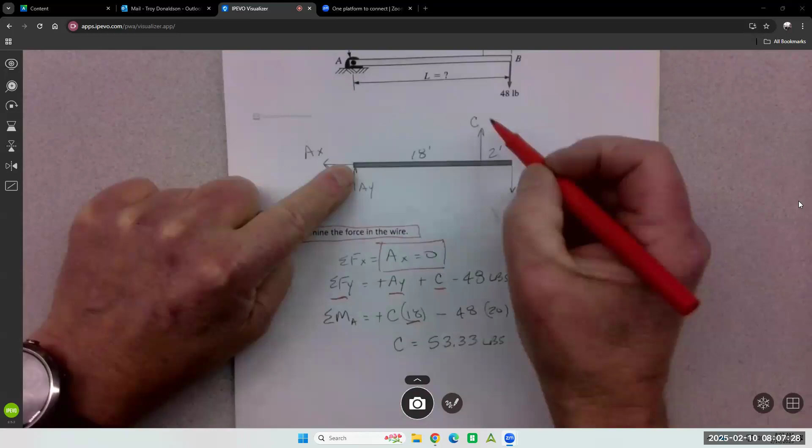Did the moment at A. That's here. So it's C times 18. Rotation is counterclockwise positive, and 48 times 20 negative. Look good now? Makes sense now. And then you just use your algebra to solve this, because this becomes the equation, right? So this statement moves to the other side, becomes positive, and then we divide by the 18 to get 53.33.

Well done. Most of you did just fine. Some missed a few little things, like you can't leave the unit off. It becomes pounds, right? We're trying to find the load in the wire. It's pounds. Direction's important, not critical. Questions?

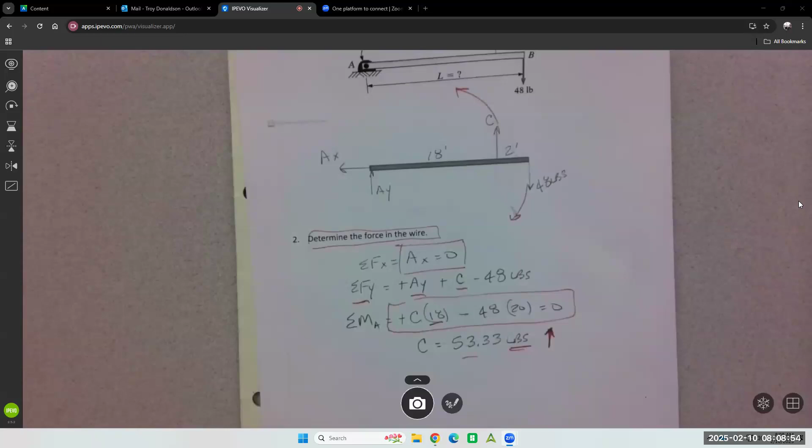Another one on Friday, quiz on Friday. It gets a little more difficult each time. Like we start throwing angled forces in here, then it's going to get a little more complicated. Questions? Any questions on the quiz? Okie doke. Silence is compliance. You know, silence means you don't have any questions. So that could mean I'm not doing my job if I'm not generating a lot of good questions.

All right, let's look at the calendar because this is a critical time in the term, believe it or not. So adult education research has proven weeks 5, 6, and 7 are huge. If you can make it through weeks 5, 6, and 7, you will make it through the term. But it's big. Like there's a lot of folks not here. We're down in numbers. Your persistence level has to go up the next 3 weeks. It's really tough. I'm just saying. Very hard time in the term.

Every term, right? In the beginning, you're all excited about the term. You're going to do really well this term. That's weeks 1, 2, 3, 4. And then 5, 6, 7, 8 are rough. Like, oh God. On an instructor level, this is when we start to feel the crunch. Like I only have so much time left and I got to get through the content. So that's what your instructors are feeling. So they're going to push at the worst time, right when you're getting a little burned out in the term. Anyway, I laid the term out for us.

This class is pretty nice because it has a follow-up sequential course. So I can pace it as we need it, but that just puts the crunch on next term to make up some more time. So that's not fantastic. But we're going to do chapter 4 the rest of this week, and then it'll end pretty much here. And then we'll go into trusses, chapter 5, here. And then week 8 will be trusses again, because it's a big chapter. It has trusses and frames in there, 2 different methods for trusses, a whole new method for frames. It's a lot, and they're long problems. One problem can be an hour, easy.

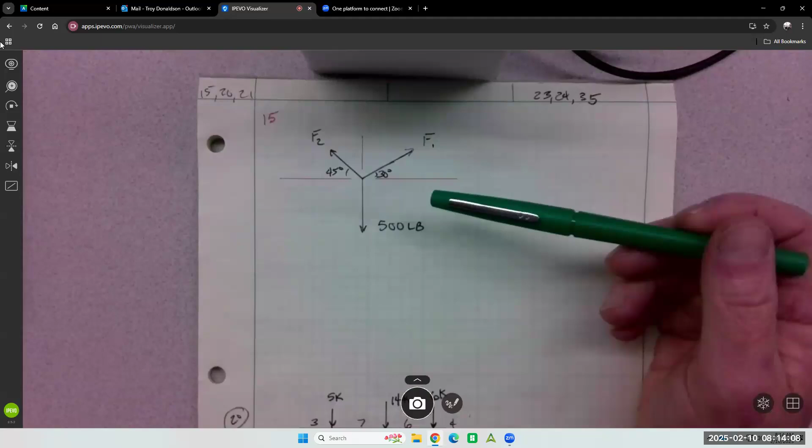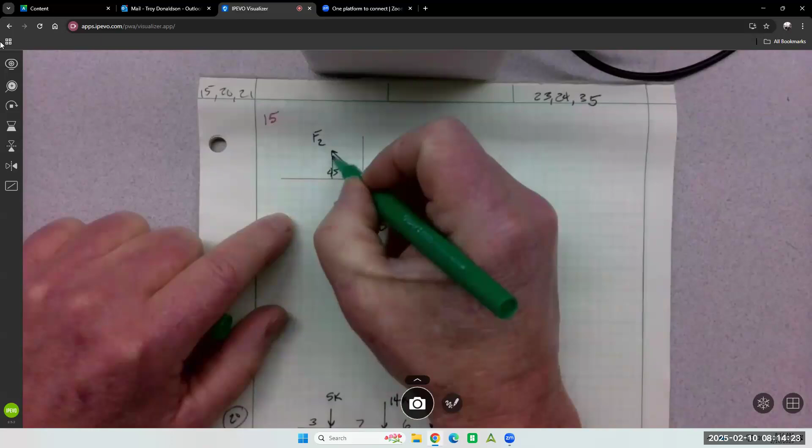Calculate the force in each cable for the suspended weight shown. So, tough problem, because how many unknown forces do we have in the y direction? We have 3 total, 2 unknown, right? This one, F1y, and this one, F2y. 2 unknown in the y direction, right?

How many unknown in the x? 2. There's only 2, but there is 2, F1x and F2x. So that means when I write sum of forces in the x, I'm going to have 2 unknowns. When I write sum of forces in the y, I'm going to have 2 unknowns. Do I do moments on this kind of problem? No, it's concurrent. So that means I have simultaneous equations going to happen. Sum of forces in the x, sum of forces in the y.

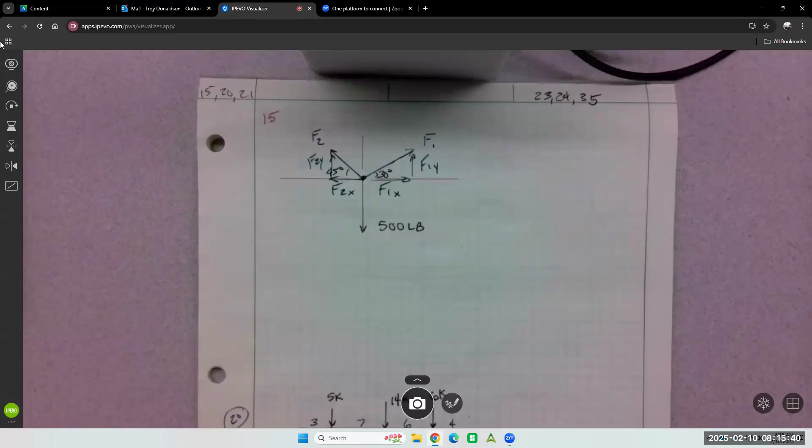So it's really good to think through these. That's what you want to think through on every equilibrium problem. You want to think through that first. Like, how many unknowns do I have in the x? How many unknowns do I have in the y? If you only have 1 unknown in one of those directions, that's where you want to start, right? But we have 2 unknowns in 2 directions. Like, oh, crud. Just means write the equations, solve for x and y. All right.

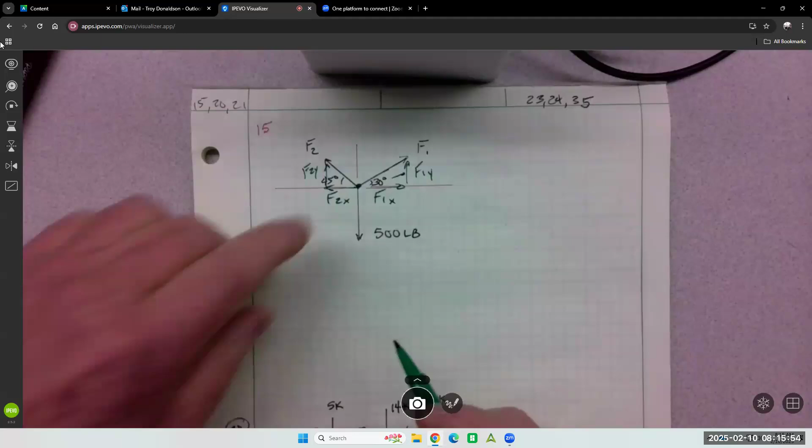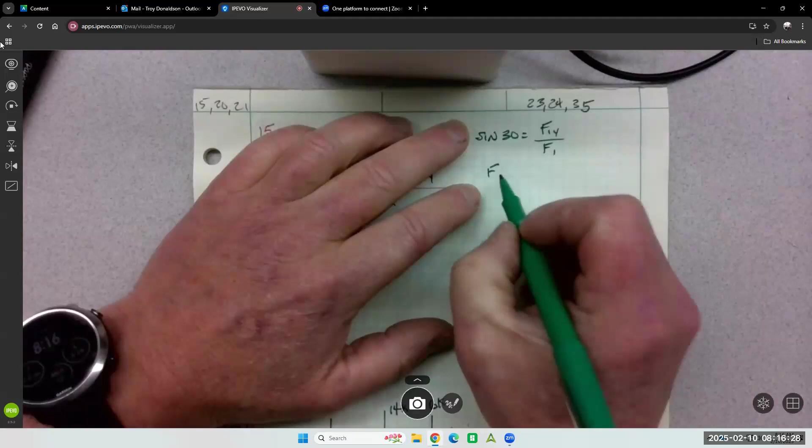So these, you can solve out the components first, so you know the formula, or you can just put it into the equation, however you want to do it. So I'll do this side right here by solving it out. So y is opposite of the 30 degrees, so that's sine. So I can write sine 30 equals F1y over F1. Everyone see that? It's using variables instead of numbers, but we have to be able to get F1y. So F1y, the y component, is equal to F1 sine 30. And that's what will go in the y equation.

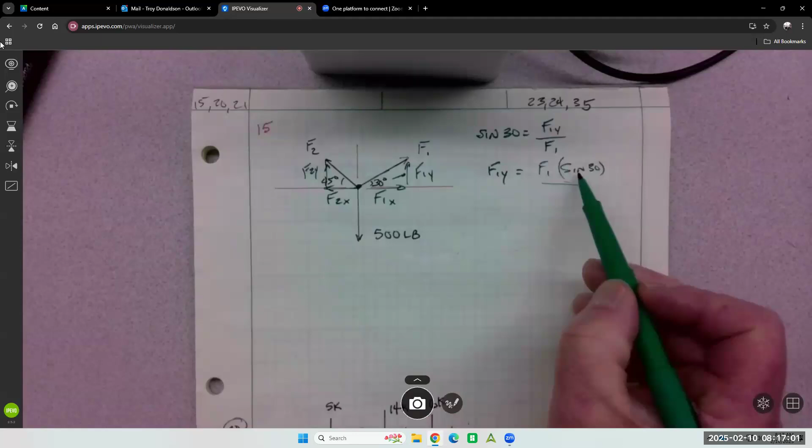Okay, so we're going to end up with F1 as the variable, which is what we want to know, and F2. So you have to do that for each component, right? Or you just know that this is kind of the format for the component, and you just have to figure out whether it's sine or cosine. Well, the y is sine, the adjacent side is cosine. So F1x is going to be what? F1 cosine 30. So there's the two components for F1. Trigonometry again, since day one, pretty much trigonometry.

So once you get that kind of rhythm figured out, then getting this one's not too bad. Sine 45 times F2 is going to be F2y. F2x is going to be cosine 45. Since it's a 45, sine or cosine doesn't matter, but I still try to write it appropriately because that's good practice for you. So now we have all those components, we can put them into the equation.

Right? I can go, oh, sum, here, I'll use a different color. Really into colors today. Anyone colorblind? Okay, hope not.

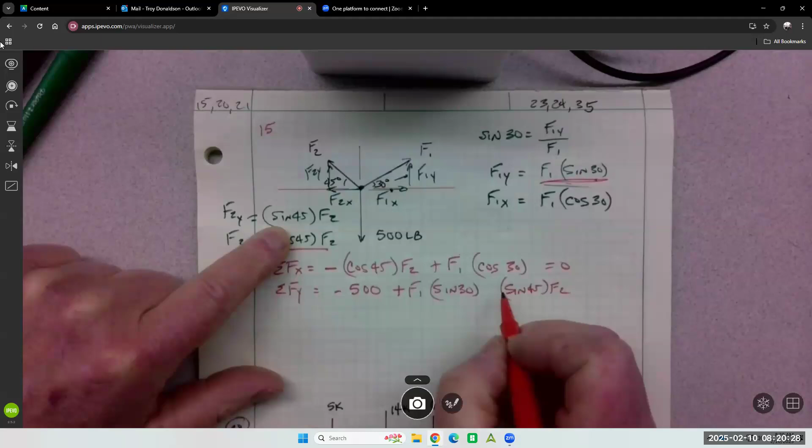If you want, these are just numbers, right? Cosine 30, you can put in your calculator. So these can just turn into F1 times a number, F2 times a number. Whatever makes it look less complicated to you, right? I tend to just do this, and now when I do the substitution, I'll turn them into numbers.

So you choose which variable you want to isolate. I would do the first equation and isolate F1, probably, because it's positive. So then this statement moves to the other side, and I can solve for F1 in terms of F2. So here I solve for F1. So I move this statement to the other side.

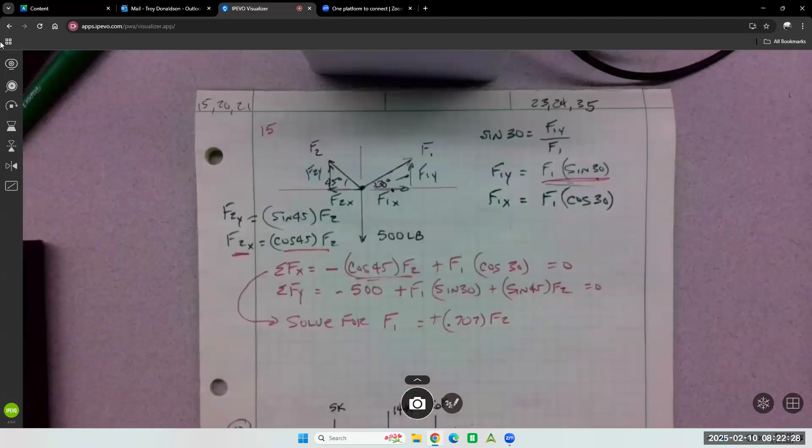All right, and move the cosine F2 to the other side, and 45 cosine is 707. So it's gonna be 707 times F2. That's that statement. Other side becomes positive, and I would divide by cosine 30, which is 0.866, which again is just a number. 0.816 F2.

Everyone see that algebra? If you don't, you got to, I want to help. So that means F1 is equal to 0.816 F2. And then what do I do with that?

Substitute it into the other equation right there. So I can write the other equation now, minus 500 plus, instead of F1, I'd substitute in 0.816 F2, times, because it's times sine 30. And I'm going to figure out what sine 30 is: 0.5. So it's times 0.5. So there it is right there and right here. And then I got to add, because I need the rest of the formula, 0.707 F2. You're just rewriting. I just rewrote this whole formula subbing in.

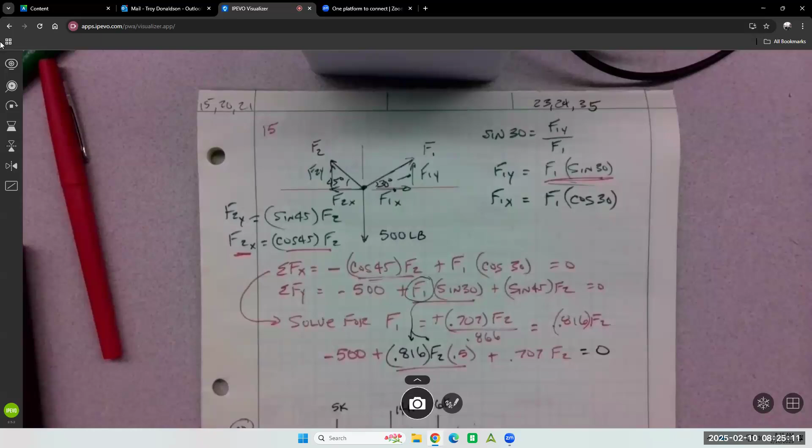Now what do we have? One unknown, one equation. This is just a number F2. This is a number F2. Add those two together. Move the 500 to the other side because it's equal to 0. Got to be equal to 0. So again, it's algebra. These two just add because they're apples and apples, F2s and F2s. You can just add this to this. Move the 500 to the other side and then divide by whatever that constant is.

So this number is 0.408 F2 plus this 0.707, that's 1.115 F2. So the next formula would be 1.115 F2 equals 500. That would be the algebra move of adding these together, moving the 500 to the other side.

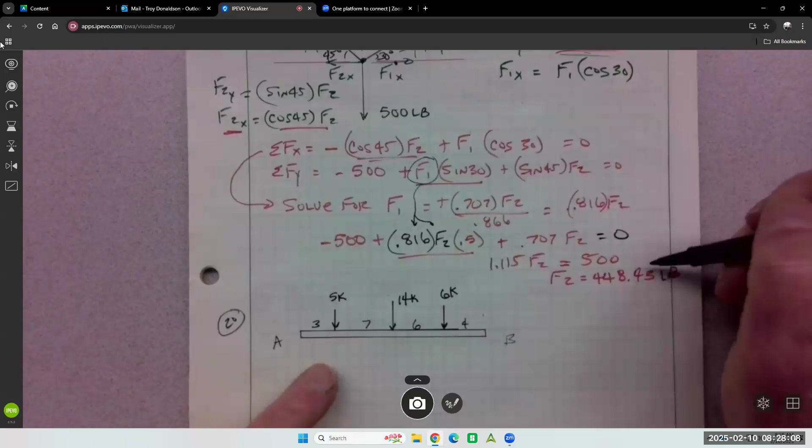Yeah, make sure you... And then you just substitute F2 back into the first equation. Yeah, so once we get F2, we substitute back into the first, yep. If there's any algebra or trig shenanigans there you don't get, you gotta stop me. So I just keep rolling here. Pick F2, sub it back into this one, and then you just solve it, right? For F1. Put this to the other side, divide by the cosine of 30.

That was a rough one. Some algebra and some trigonometry. So F2 is 448, F1 is 366.

So just to kind of wrap your head around that, how much load was hanging down? 500 pounds. So almost 500 — 448 is here in F2, and 366 is here in F1. So hanging a load off at an angle magnifies the loads, like dramatically magnifies the loads. Everyone see that? It's an important kind of logical thing, just so you know when you're working with these concurrent systems, what goes on. It's crazy.

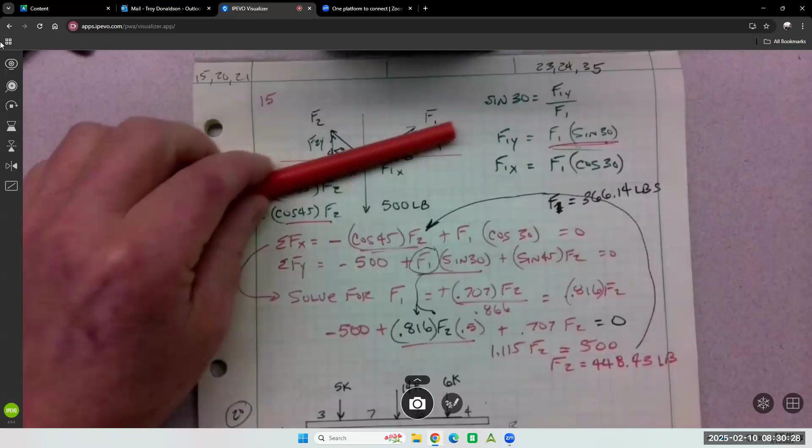Like the flatter these get, what do you think happens to the load? Goes huge, huge. As this load goes out flat, and this load goes out flat, it dramatically increases. It's crazy. Oh, you could make a graph. What happens when they go perfectly horizontal? Like, what's this situation?

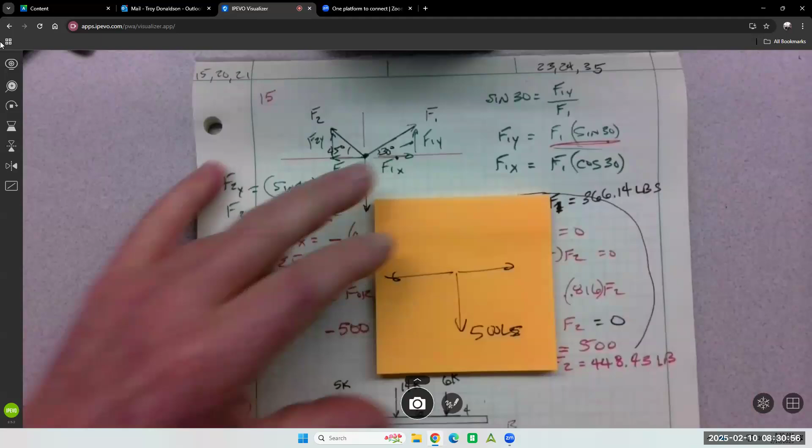It's just statically impossible. There's nothing to hold the 500 pounds up, right? There's no other Y force. It's not possible. So when the gymnasts do the iron cross, I don't know if you've ever seen it, but they hang from the rings with their arms perfectly straight. You want to say that's impossible. So it is not possible — if they didn't have lats, lateral muscles, right? These things right here that are huge. Like if you see a gymnast that can do an iron cross, their lats are enormous. Essentially, they're building a triangle here out of their body, and they're able to hang that way.

But if they didn't have lats, it's not possible. It's crazy, still crazy the amount of load required. We'll be able to do this calculation. The amount of load on their lateral muscles is insane because you don't get your lats out there that far.

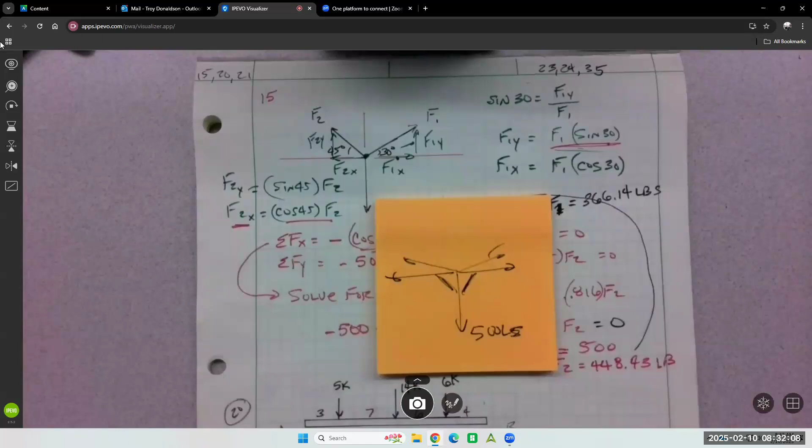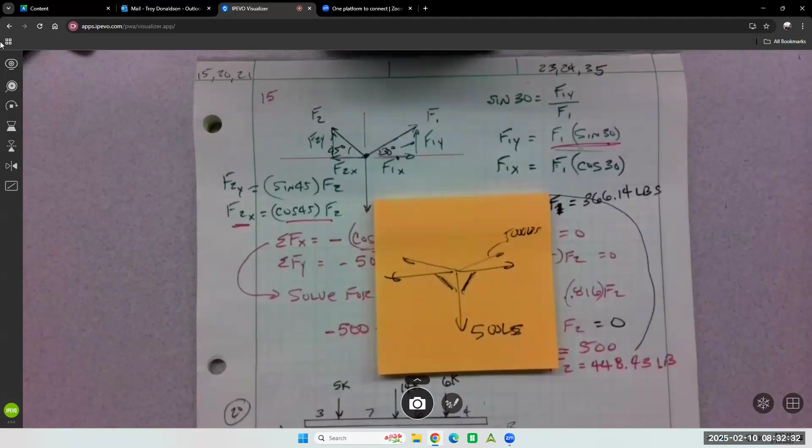That triangle's not that big to carry that weight. So if this is just slightly off, it's possible, but these can go up to 10 times magnitude - this could be like 5,000 pounds. So if you ever see somebody hooking something up to lift it and they didn't have chokers long enough, or they didn't have the right chokers and cabling, and they have it super flat, it's just going to bust things up. Those cables just won't take it, it'll shred them.

Anyway, all right, good, good, good. Hopefully you learned a little something out of that. Let's do the next one, 20.

The beam shown carries vertical concentrated loads. Calculate the reactions at each support, neglect the weight of the beam. We have a roller at B and a pin at A.

How many reactions does a roller get? One. Anyone remember what the rule is with the roller? Perpendicular to the surface removed, that's what's key. So if you have a roller and a horizontal surface, we remove the surface and the roller goes in perpendicular to it.

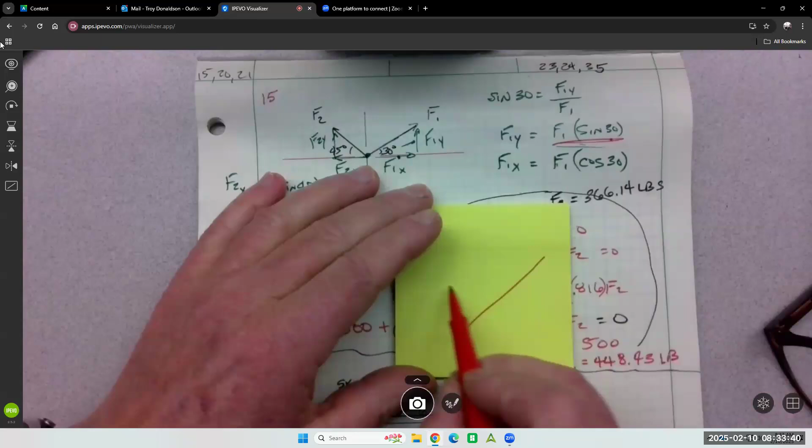But if you have a surface that's like this and a roller like this, we've got to remove the surface, and the roller goes in perpendicular to the surface removed. That's here. Very weird, very rare, not common, right? And then the other one is...

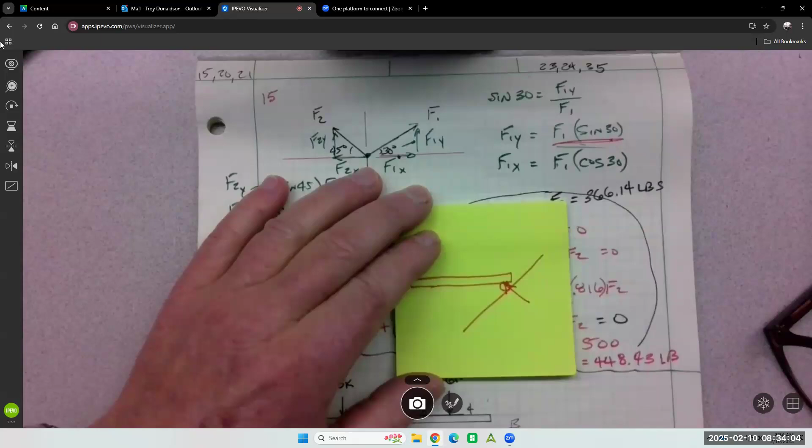if you have a vertical wall and a ladder laying against it, and they say it's smooth or frictionless, it's like a roller. It'll hold perpendicular to the surface, but it just won't hold up and down, so it's a little bit like a roller.

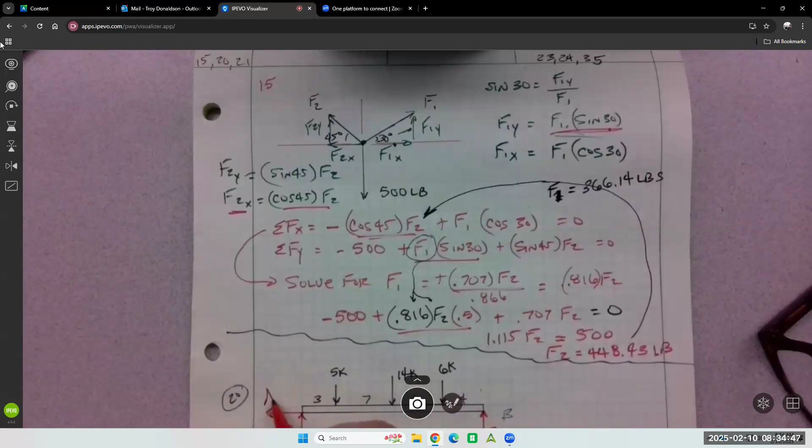All right, so we get 1 at B. What are we going to label it? BY. How many at A? 2. Which way do you think they go? Up - we're going to say up, AY, and somewhere AX.

And I assume BY going up. Everything's coming down, you have the supports at the end of the beam, they both got to go up. Just looking at it logically, that makes sense.

Now what do we do? Equations - yeah, apply the equations. If you don't know what to do, we could think through it first. The better we get at this, at forward thinking, the easier it's going to be.

So let's think about summing forces in the X. How many do we have? 1. It's got to be equal to what? 0, just note it. I wouldn't write that formula, right? If it's that simple, I'm not going to write the formula - I'm just going to note AX is equal to 0.

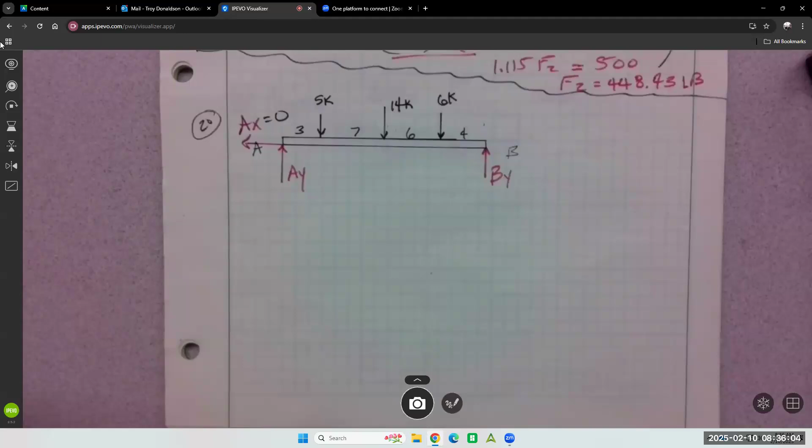All right, how many unknowns in the Y? 2. Which ones are they? AY and BY. So we could write that formula - we may need it later. Often you do, so I'm just going to write it out.

But we thought about it first, and we know there's going to be 2 unknowns, and we know we're not going to be able to solve it. All right, what are they? Plus AY, plus BY, minus 5K, minus 14K, minus 6K, and what's that equal to? 0.

This 0 means equilibrium, right? It means there is no resultant. Equilibrium means there's no resultant left over - we're accounting for all the forces.

All right, how many unknowns? 2. So I always get students that don't process that in their head, and they try to solve this. Like, I wrote an equation, I should be able to solve it. Nope, you can't - there's 2 unknowns in there, move on.

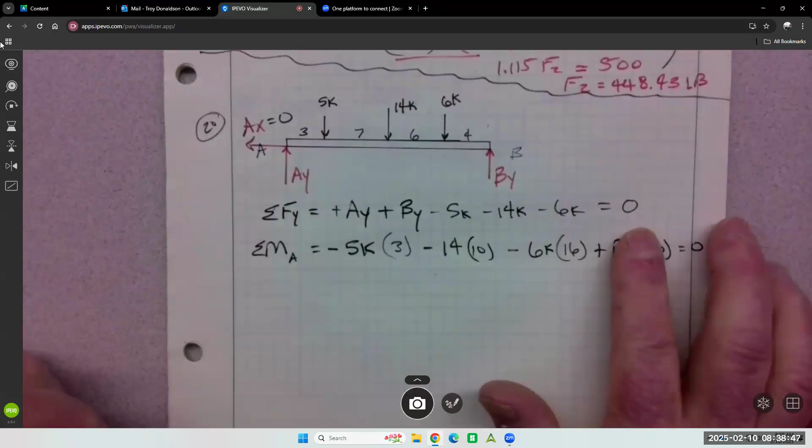Students don't put the variable in. Well, we have to have something to solve in the equation, right? If you didn't put this in, it's just all numbers. I can't solve for anything. So we cannot forget the reactions when we're doing the moments. We need a variable in there to solve for. And it's a force, just like the rest of them.

It's rotating the other direction, so it's positive. Set the equation equal to 0, solve for By. If By is positive, I leave it alone. Let it sit right there. And everything else moves to the other side and becomes positive. Right? So that's algebra. That's a number, that's a number, that's a number. It all moves to the other side. Add it up.

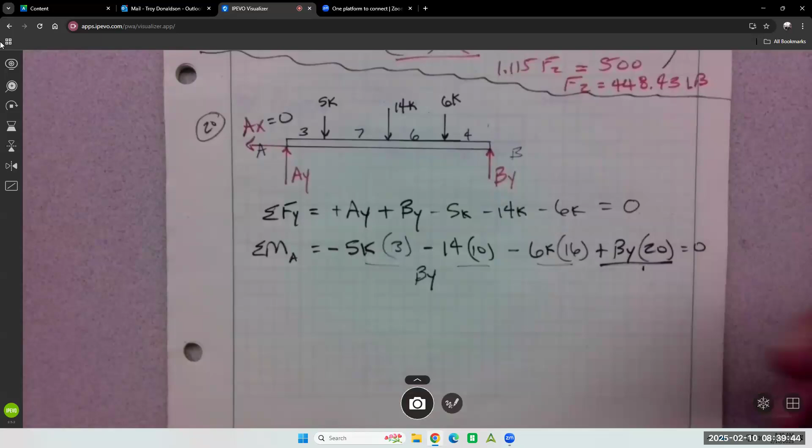15, 140. 251 kips divided by 20 kips. Oh, 20 feet. Kip feet. So all of these are moments, kip feet, kip feet, kip feet. That's 251, and then we divide by the 20.

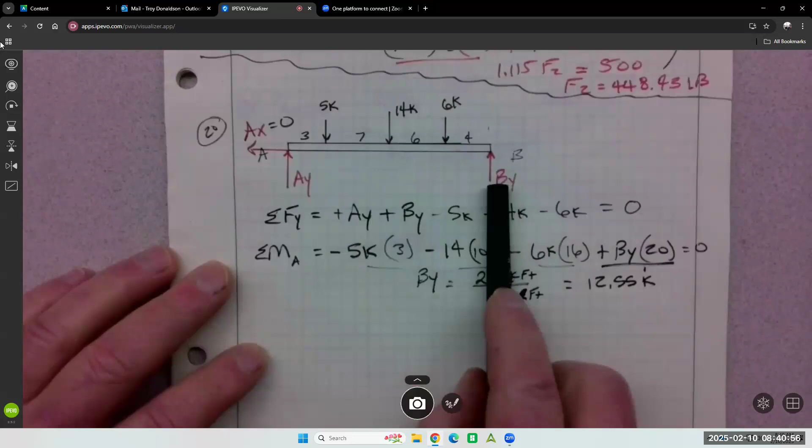Does that make logical sense that it's 12? Looking at the loads? Yeah, sure. If we got 14 and 6 is 20, so we have 25 total, right? If the 25 was directly in the center, that would be like 12 and a half on each side. So it makes sense that we're somewhere, kind of evenly distributed, I would say, not perfectly. So yeah, 12.55 makes sense. Looks good.

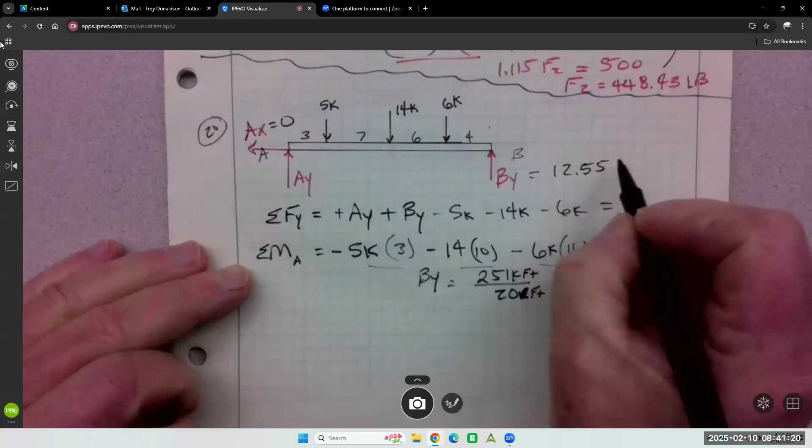So that's By. How do we get Ay? Yeah, so just take this, plug it in right there, and now you only need to know Ay, and it's just summing forces in the Y, right? 6 down, 14 down, 5 down, 12.55 up. That's got to put it in balance. By's or Ay's got to balance it out.

So, 25, 25, 12.45. Done.

Now we can go to strength of materials and we can calculate the bending stress of the beam. Or we can calculate pin diameter needed to hold the pin. Or we can calculate roller compression loads. We can do a lot now. We know all the loads. We can calculate deflection. How much is it going to deflect?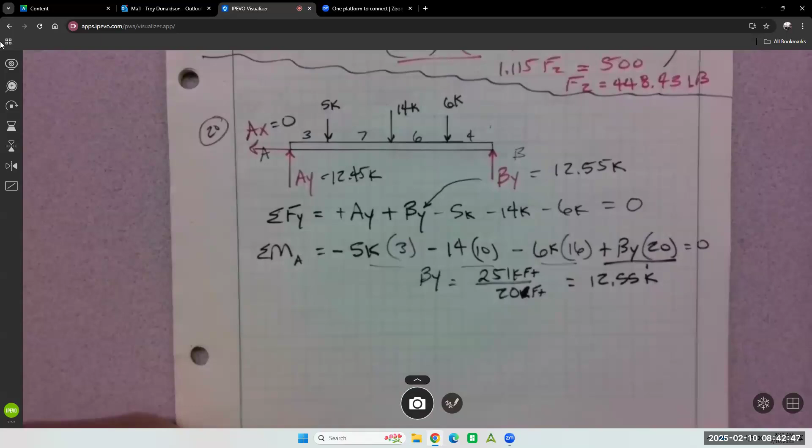That'll be next term, we can choose a beam. How big does this beam need to be to carry 25,000 pounds? That is a lot of load. Over a 20-foot span, that's like putting what? 5 cars, heavy cars - I don't even think cars weigh 5,000 pounds. All right, 5 heavy cars on a 20-foot beam. A dump truck full of gravel going across the little bridge, right? Somewhere in the backwoods.

Wow. All right. Questions? It's okay? All right.

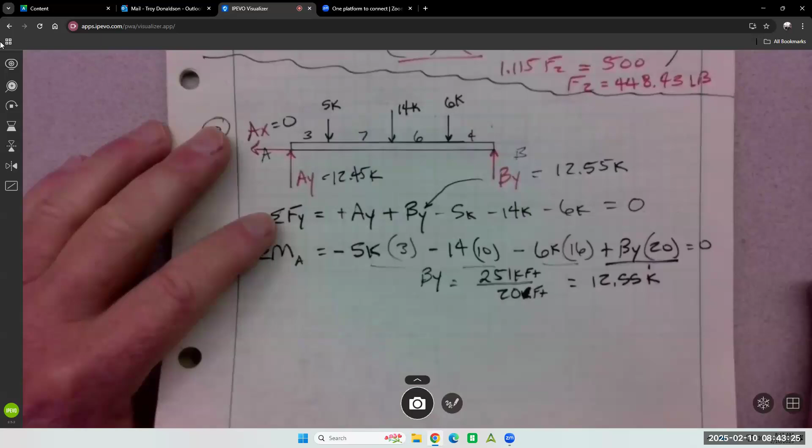The grind here, we just keep going. 20. 20? No, 21.

Pin at A, roller at B. Huh? Still didn't hear you. It's that fan, or else I'm getting old. One or the other. You gotta speak up, you gotta project, man.

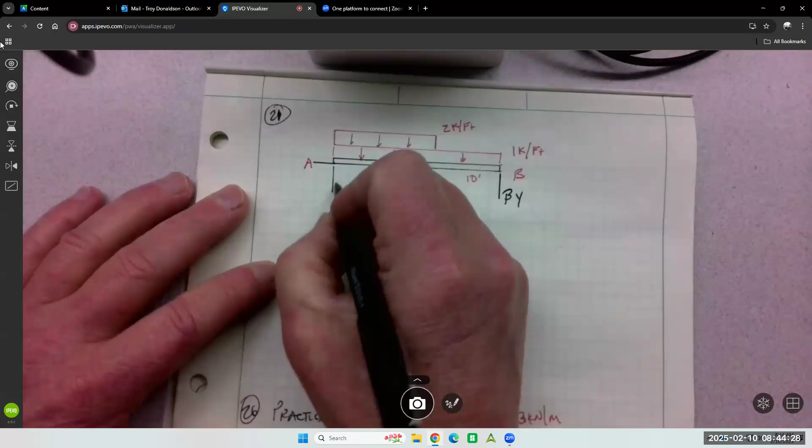X and a Y at A. Is that right? Am I at the correct side? Yeah. And a Y at B? Yeah. And now we know how to label them: BY, AY, AX.

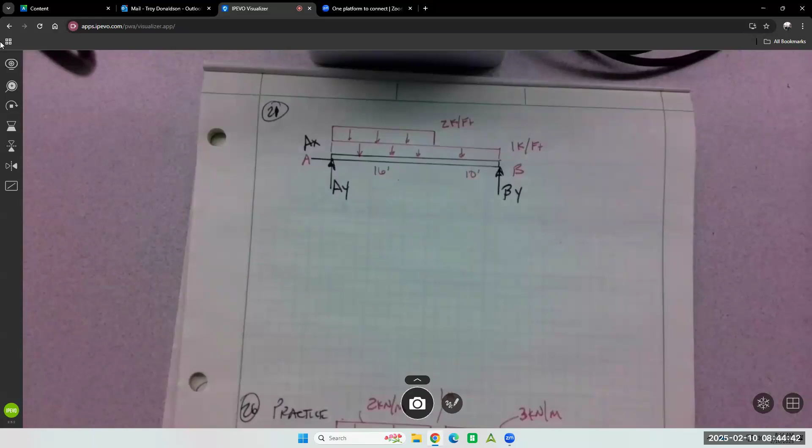Which way do the Y forces go? Up. Easy peasy so far. What about the X force? Doesn't matter because it's equal to 0. Is it always equal to 0? If there's no X force, it is. If there's an X force, though, it is not equal to 0. So don't make that mistake of just assuming all X forces in life are 0. So not true.

Okay. Now what do we do? Yep, concentrate them. Concentrate the distributed loads. How do we do that? Find the area, put the load through the geometric center.

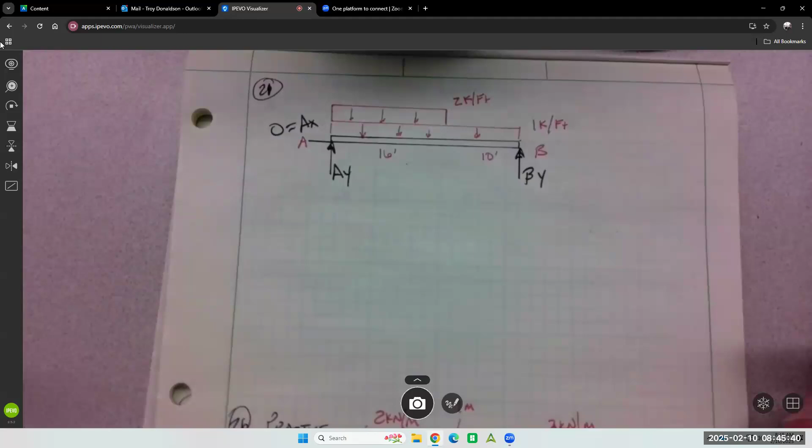All right, so the 1 kip per foot, right? Yeah, so 26 times 1 is 26, and it goes halfway. So this is the 16 mark. 10, it's gonna be in here somewhere. I'm gonna make it green right there. 26K. Right, so it's 13 each direction.

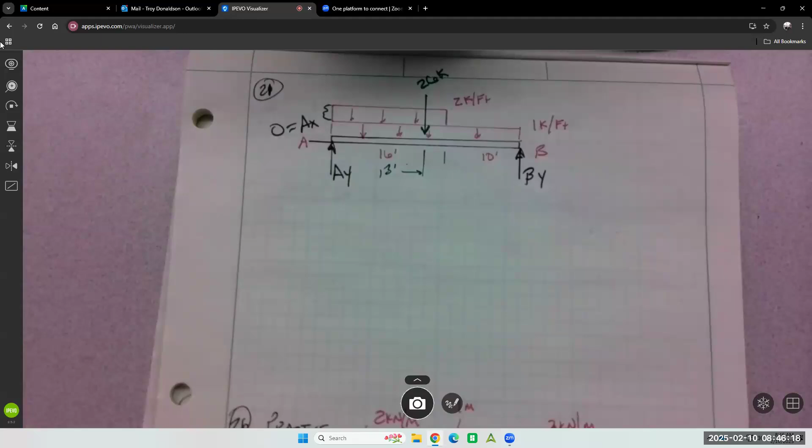How big is this one? Huh? Yeah, so it's 1 times 16. It's not 2. This marks the elevation kind of, that load. Right? So it's 2 to here, it's 1 to here. So that means from here to here is 1 kip per foot. So it's 1 times 16, 16K. So it's got to be careful with that. And it's a new thing, so it's totally okay if you muck that up.

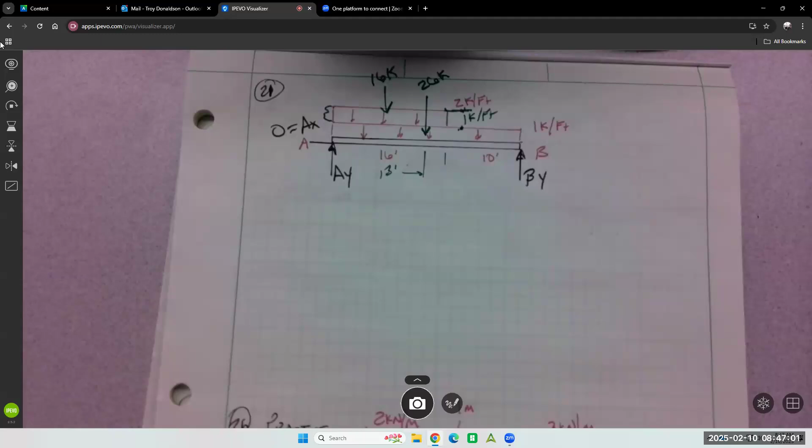Now, with that said, look at the problem. It's super easy to interpret it differently because look at this load, it appears to be twice as big as this load.

So if we're like, oh, well maybe this is 2 on top of the 1 - I could read it that way. That's not normally how we do it, we usually do it like this: that's 2, that's 3. If that one was over here, it would just be 1 on top of the 2. So if you did it the other way, don't erase it, leave it, because I think it's legitimate, since they made it twice as big. So it kind of looks like maybe this is 2 on top of the 1.

So how'd you do it? I did it with 32. Okay, leave it, leave it. It's not wrong, I could interpret it that way too, for sure. So let's do it that way.

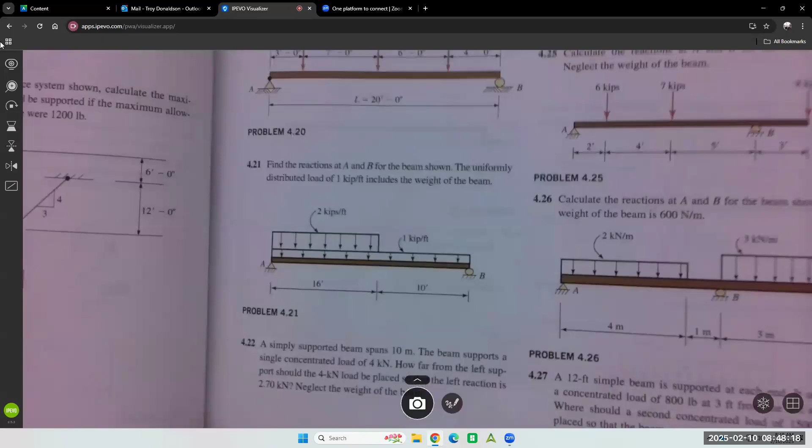Let's make it 2 on top of the 1, so now it's 3. If you deal with this by itself, it's 2 times 16, which is what? 32. Well, let's make it 32. So that's a perfect opportunity for like an assumption.

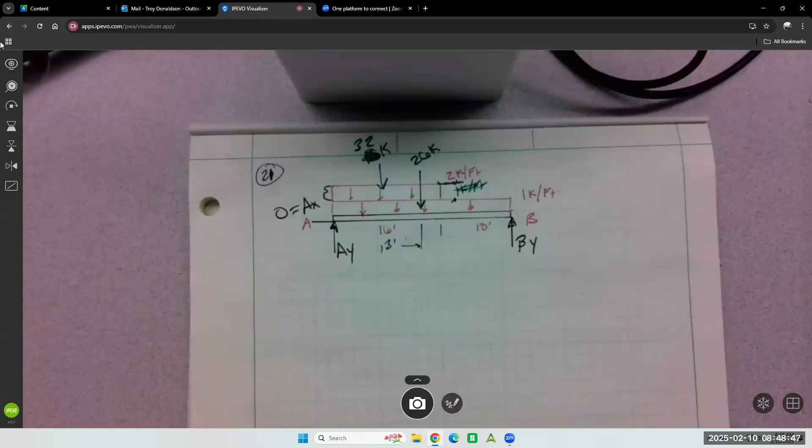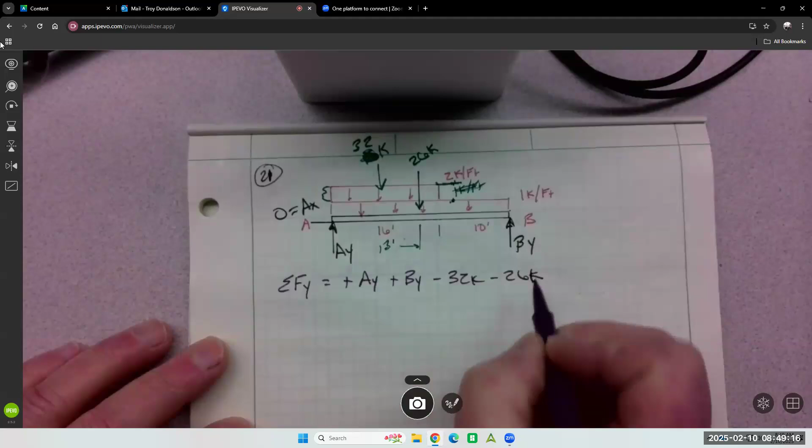Now what do we do? Yep, apply the equations. This time I'm just going to write them, I'm not going to do the x, but I'll do the y. What are all the y forces? Any others? That's it.

Okay, repetitive. We just do the same thing over and over for these kind of problems. These are called parallel force systems. If it's a parallel force system, then yeah, you just float through it like this. We gotta do a moment. We're at... sure.

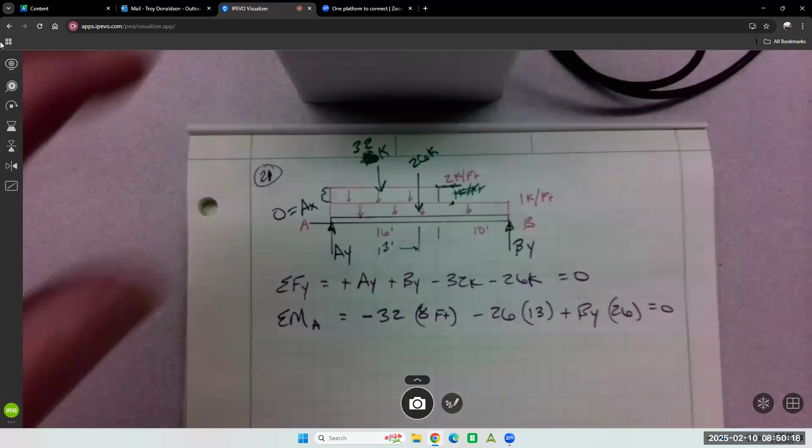And then we gotta be careful: 32 times 8, and rotation negative. 26 times what? 13, rotation negative. And By times 26, rotation positive. Set it equal to 0, solve for By.

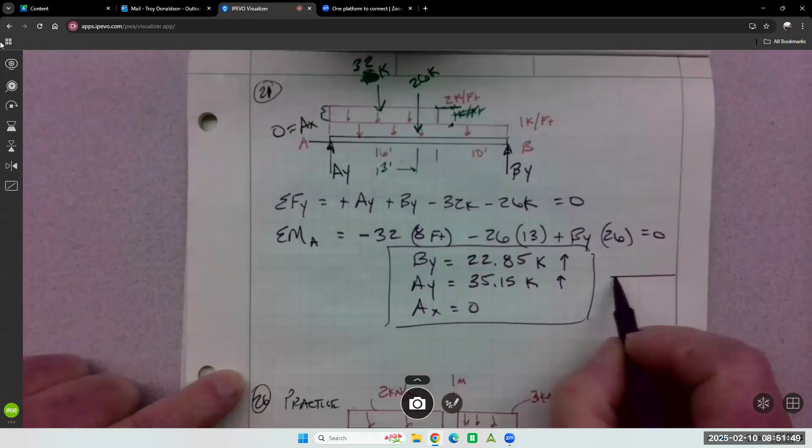22.85. What's the unit on that? The force, and it's going up. And then we just balance our forces by putting it back in this equation.

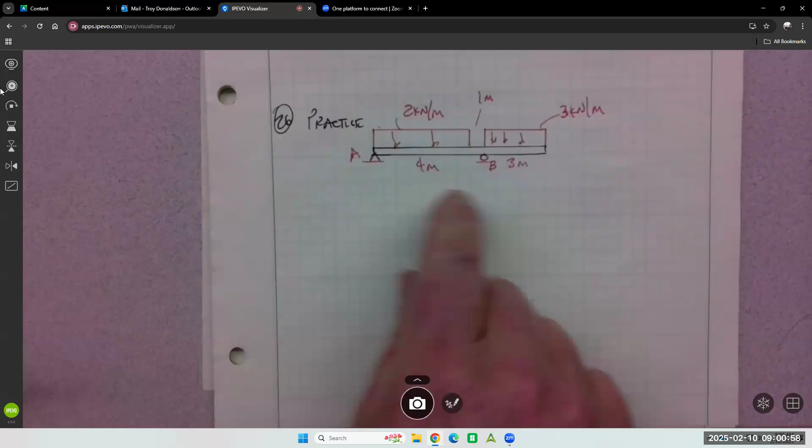So for statics, it doesn't really matter that this is overhanging, but it is overhanging, right? It's called cantilevered, it's cantilevered out past the support. So it does change the moment and some rotation. It's definitely hard on the beam, and it's difficult to calculate deflections because we have two different deflections going on, but we don't have to do that this term.

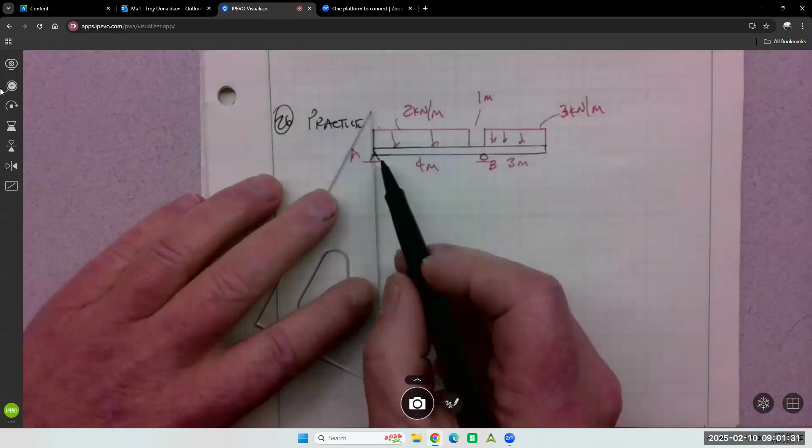We just have to come up with how much load is on that roller and how much load is on that pin. So same rules, just be careful when you're doing your moments because you have a support that's not at the end of the beam.

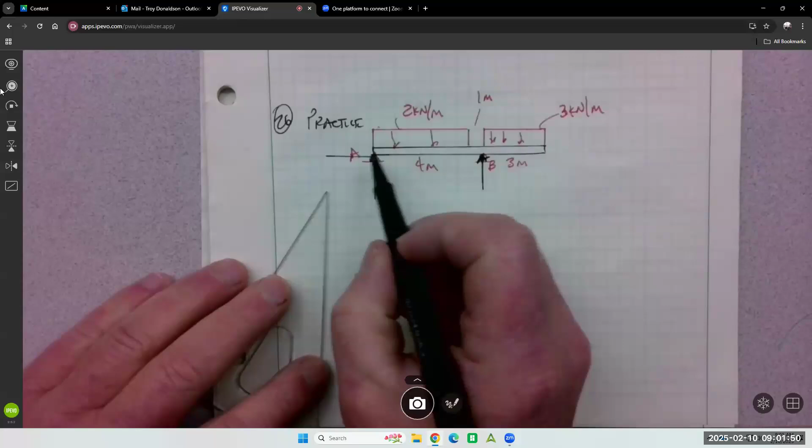So start with the free body diagram, just like we always have. In a true free body diagram, I would remove the ground and I would remove the supports. I'll work it slowly, you can work ahead of me.

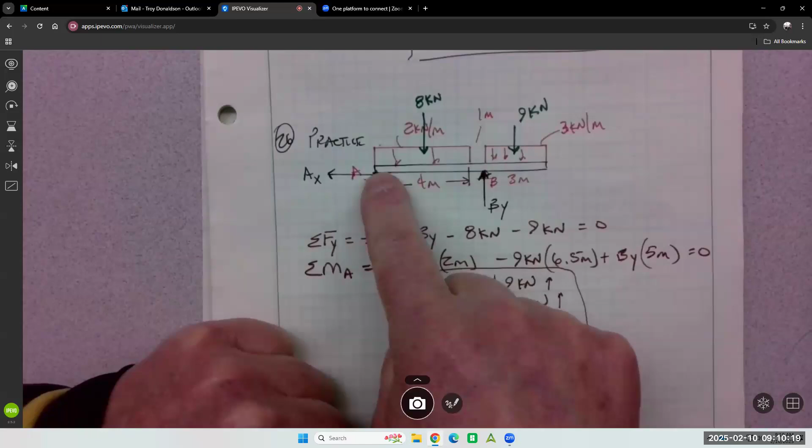That rotation is still clockwise around A, because you ignore B, right? You ignore all the other forces—just do one force at a time. So it should be negative 8 times 2, negative 9 times 6.5, plus BY times 5.

It's good. All right, let's do one more. This one we'll do together.

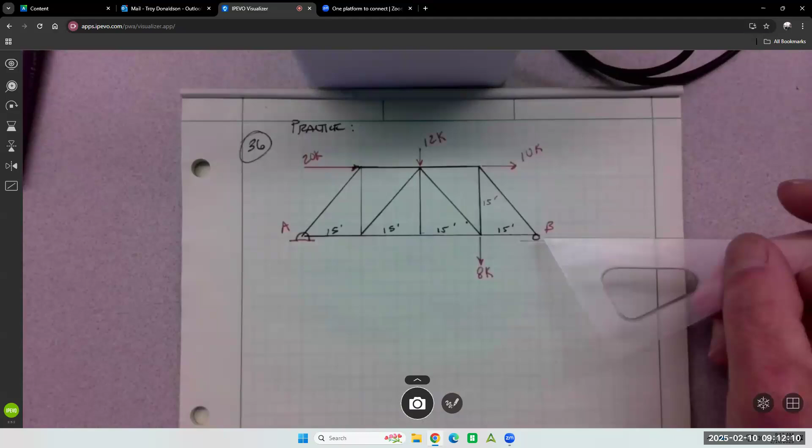So this is where we're heading when we do trusses. But the first part of a truss is just what we're doing right now, which is finding out what the load is on the roller and what the load is on the pin. So just because it's got height and width, nothing changes for our approach. It's the same thing: we sum forces in the X, we sum forces in the Y, and we do moments when we have to. Okay?

Free body diagram first, so just same steps as we've been doing. So let's all draw the free body diagram first and draw the drawing. I'll give you some time to do that.

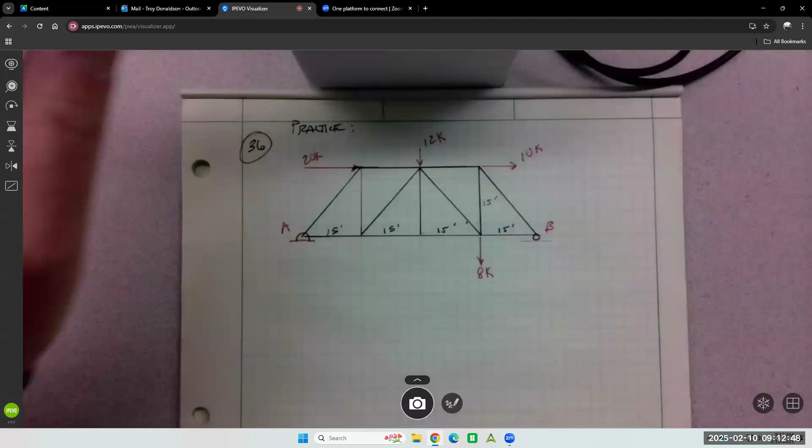You can go straight to just the free body diagram. We never take the truss apart when we're doing reactions. So what we're doing right now is finding the reactions. We leave the truss together—it's one solid object. That's all we care about.

This doesn't say something inappropriate, does it? Let's go.

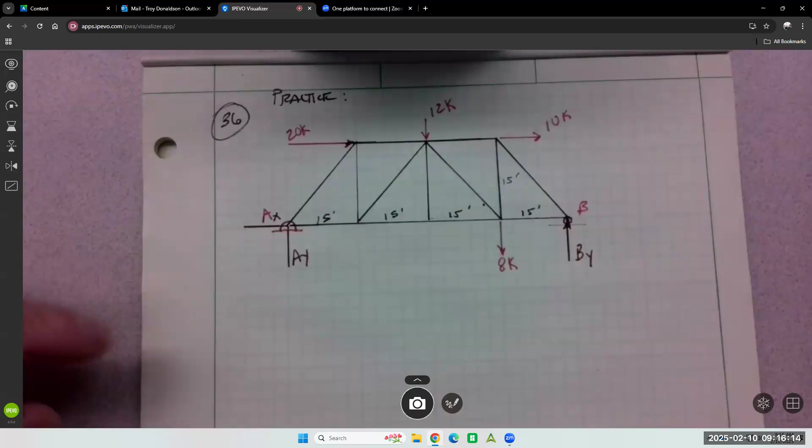How many does a pin get? Gets 2. How many does a roller get? Gets 1. BY, AY, and AX.

Guessing both of the Y's go up because all the load's coming down, right? What about AX? Definitely to the left, because the rest of the X loads are to the right.

Everybody got it drawn? Or do I need to wait? Are we good? Matthew, you good?

Okay, apply the equations, right? Sum forces in the X. What are they? Plus 20K, because it's going to the right. Plus 10K, minus AX. And all that's got to be equal to 0.

Solve this equation and we get AX equal to what? 30K to the left.

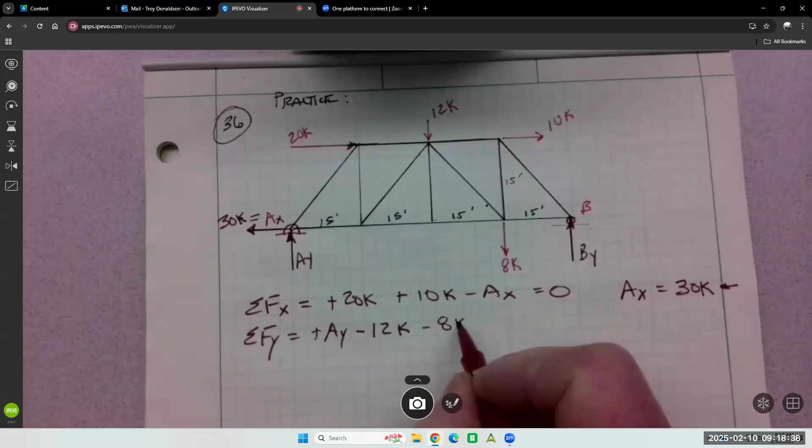Get them all? When it gets complicated, you might want to mark them off somehow—just don't want to miss one. Got to get them all. So AY up, BY up, 12K down, 8K down.

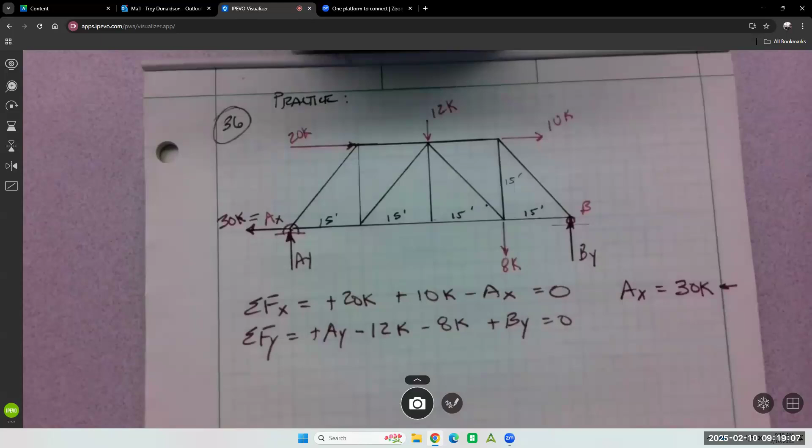How many unknowns? 2. Can't do anything with it. What do we do?

Moments, yep. Where do you want to do them? At A. Good old A. We could do them anywhere, just so you know, but it is pretty common to.

But we didn't want to do that—yeah, it gets rid of 2. Gets rid of AY and gets rid of AX, right? Those two don't create a moment about that point. If the force goes through the point, no moment. If the force does not go through the point, it creates moment, and we've got to include it.

So you got to go one at a time and say, okay, does this 20K go through that point? Does not. So that means it creates moment. 20K times what?

Well, times the perpendicular distance. That's this distance right here. How far is that? Yeah, it's 15. All these verticals are 15, so it's 15 feet.

Rotation—what kind of rotation does 20K make about point A? Clockwise, negative. Every force that doesn't go through the point has to be included.

What about the 12K? Does it go through A? No. And its perpendicular distance, line of action here, perpendicular distance here, 30.

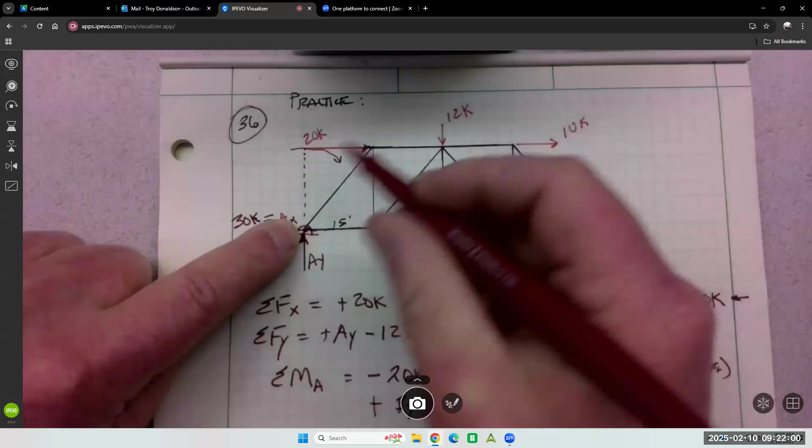And then just working my way around the truss, I've got to 8K. 8K times 45, and its rotation is negative. Just work your way through it.

And I ran out of room, so I just dropped down to the next line. The equation just continues.

So on more complicated problems, when you've got a lot going on, I count the moments 1, 2, 3, 4, 5. Then I count 1, 2, 3, 4, 5. So somehow you have to keep track of which ones you have included and which ones you missed or don't get included. These two don't get included because they're going through A. They drop out.

BY equals. Keep your signs straight—BY is positive. I'm going to leave it there. Everything else moves to the other side, becomes positive.

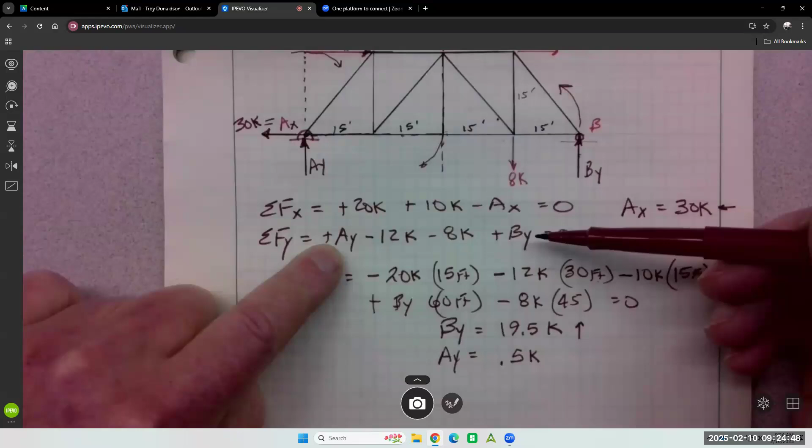Crunch that moment. Tell me what you get. You get that? 19.5? Yeah. So then what do we get for AY? We take BY, we plug it back in here, and we solve for AY. So we got 12 coming down and 8 coming down. So how much is that? 20 coming down, and we have 19.5 going up. So we need another 0.5 going up to balance it out, right?

It's good. Do we believe it? Huge load here at B, right? Everyone see that? Tiny load here at AY, almost nothing. Why would that be? Seems like a lot of load out there for nothing here. What's this 10 and 20 trying to do? Push it to the right, but it's also trying to do what about point B? It's trying to rotate this thing, isn't it? About point B, which is lifting it off of AY.

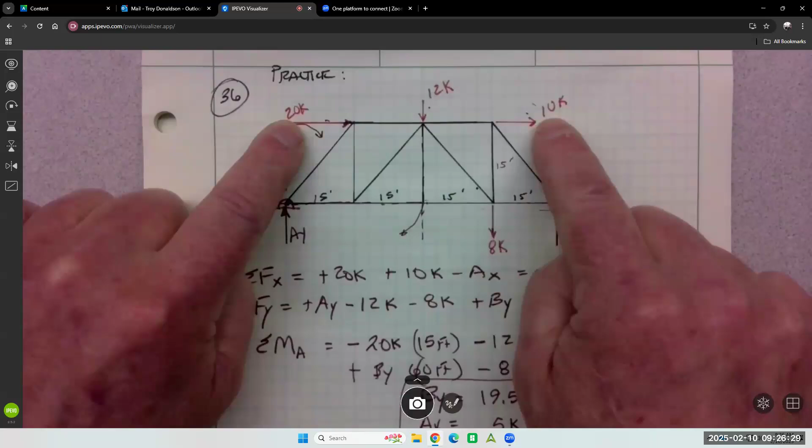Even though 12 and 8 are pushing down and AY is fighting that, 20 and 10 are bigger than these two. So the effect of this thing trying to rotate around B and the 12 and 8 pushing down almost completely unloads that pin. It's got a little on it, 500 pounds, right? But compared to the loads, it's pretty much in balance. But that's why that's a pin.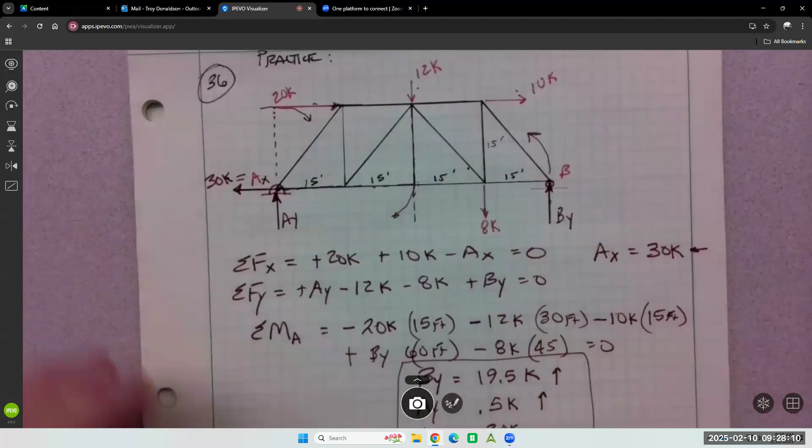With these side loads up high, this thing wants to rotate. This could have been holding down easy. If this would have come up negative, right, that would have meant it doesn't go up, it's going down. It's holding down. But that's why that's a pin and not a roller. If it's a roller, it can't hold down. A roller is just like a BB, right? A ball, a golf ball, whatever, tennis ball. It can't hold down. So the design of this thing with the pin here and the roller here is good for that side load.

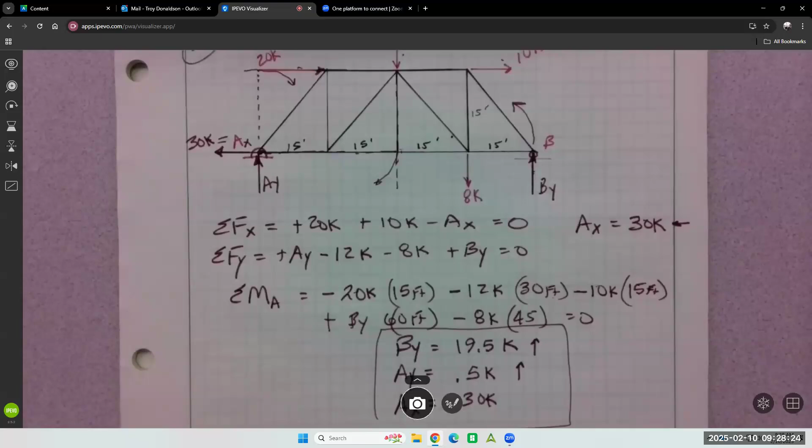Questions? These are like the ones you have for homework. Notice that we didn't even think about any of this stuff. We just treated this whole thing like it was a solid thing, right? That's the first step of trusses. Leave it together. Don't take it apart. You're not doing an analysis inside the truss. You're doing an analysis of the external forces. That's our first step in trusses. So that's why we do it in this chapter.

Before we go inside the truss, next chapter we'll say, okay, if this is point G and this is point F, how much is the load in GF? Right? That's what we do in chapter 5. It's like, oh, now we got to figure out what's going on inside the truss. But this is your first step, figuring out what's going on outside the truss. And then you're just one step away from being able to design a truss, right?

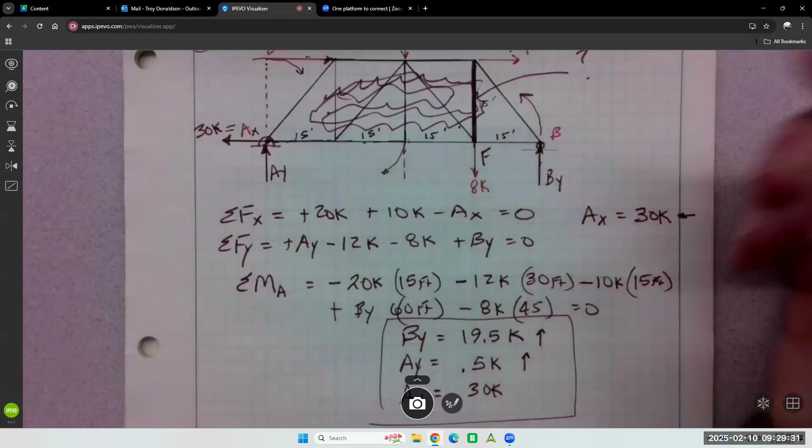Once we know how much that load is, then next term we'll say, all right, it's got 10K on it in compression. Can we use a 2x4 for that? A wood 2x4? Well, I don't know. We have to figure out the stress, right? We have to calculate stresses. So if it'll carry it, then that's great. If it won't, then we need to put a 2x6 in there, a bigger piece of wood, right? So that's where we're headed.

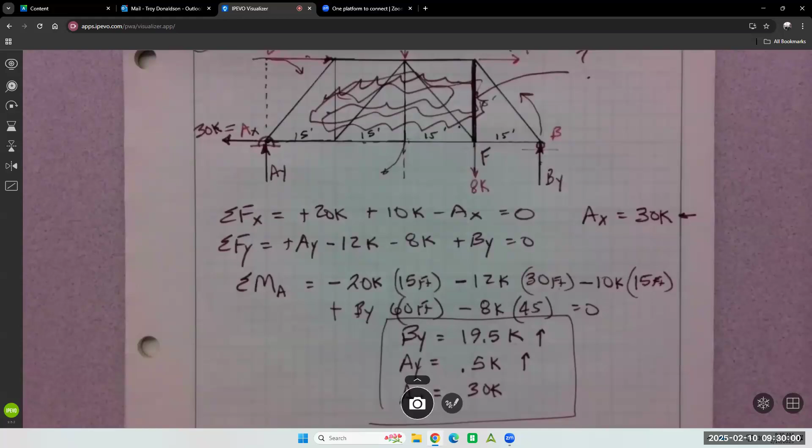All right, your homework is 23, 24, 35. 23, 24, 35.

Good job. Hang in there. Fight the good fight. This is why everybody doesn't go to college. Right? When you're at that party and they're like, everybody goes to college. Nope, everybody does not go to college. And it's because it's hard. And everybody definitely doesn't choose engineering when they go to college because it's even harder. So good job. It's so worth it, y'all.